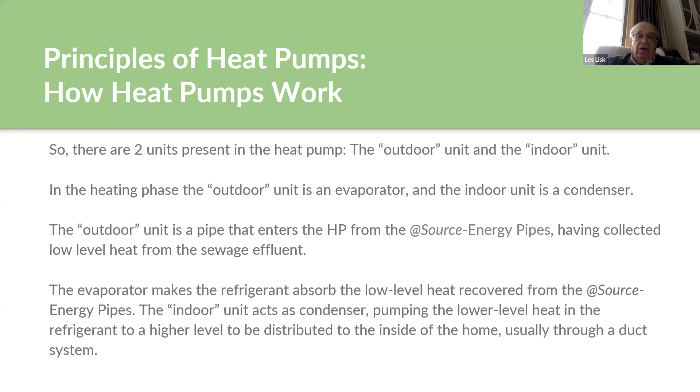Now, I don't know if you can move on a little bit, John, to the geothermal. The one thing with geothermal is that if you have pipes embedded in the ground, it's at a constant temperature all year round. Whereas with an air-to-air heat pump, it varies. It's cool at certain times of year, and it's very warm at other times. Geothermal, if you go down 6 to 10 feet in the ground, it stays almost the same temperature all the time at about 55 degrees, 57 degrees Fahrenheit.

So the efficiency there is that if you wanted to heat the home, you're pumping solution through these pipes in the ground, bringing it into your geothermal heat pump, and if you wanted the room at 70 degrees, as I think someone had just said they turned up the temperature, you'd bring it in at 57, you would only require enough energy to bring it from 57 to 70 degrees, so 13 units. Same with cooling. If it was 80 degrees out and you wanted to bring it down to 70, you'd only have to have 10 units of energy in order to cool it down.

And somebody says, well, how does this work? It's basically a little magic. It's called a TX switch. And it switches from cooling to heating. It goes back and forth automatically. So you set the temperature in your house at 70 degrees and you leave it.

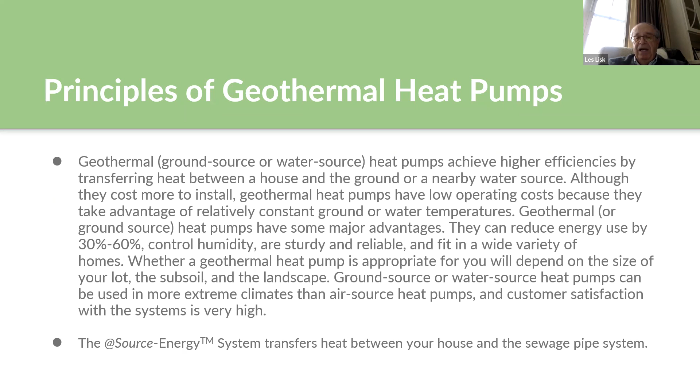Now, the next thing, we went a step further. With ordinary geothermal, I mentioned that there's pipes buried in the ground 6 to 10 feet down where we circulate a fluid through. You can take well water, taking energy out of it, putting it back in another well. You can have it circulating in a lake, taking the water out, putting the water back in.

What we do with our geothermal @Source pipe is that we have a heat exchanger embedded, and John will go into this in detail after. We have it embedded in the walls of our concrete sewer pipe. So the effluent goes down the sewer and it heats up the pipes, and we take the energy out of it by circulating a fluid in our heat exchanger around in the pipes and bringing it back into the geothermal heat pump.

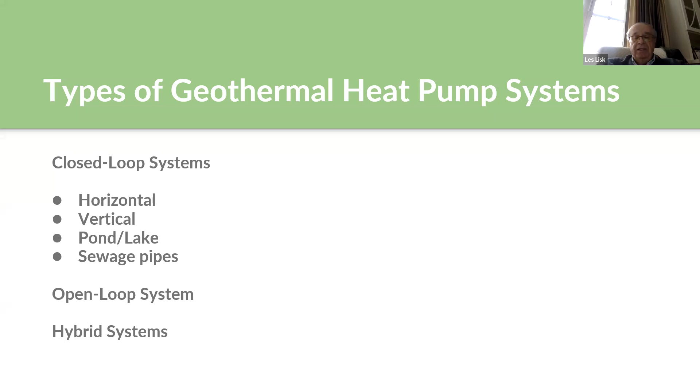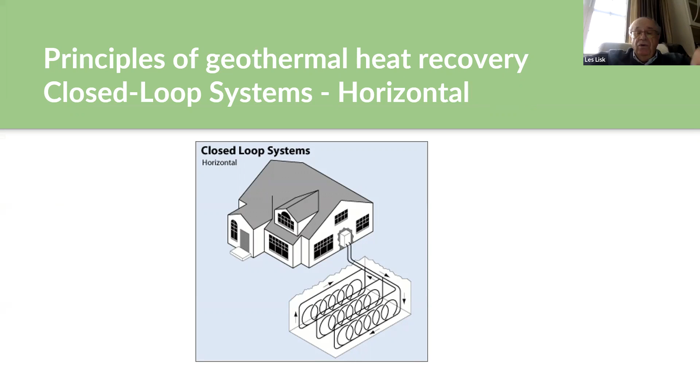Plus, we also use the surrounding ground as a heat source that we can take energy out of or put energy back in, as I was saying before, for cooling. So we use it both ways. And it's very efficient because the system's already there once you install it, and you don't have to install a separate unit for geothermal. So that's a basic principle of it. You can go into detail, but all it involves is a condenser and an evaporator, and it's a very simple system, whether it's a heat pump or a geothermal heat pump.

Les had described a little bit of the system that we have. Here's a little more detail. It shows a house on the right-hand side of your screen with a heat pump, and the heat pump then circulates its fluid. I don't even see my mouse on here. The heat pump circulates its fluid down here and down this line here, and it goes into what we have as a heat recovery system embedded in the walls of our sewage pipe.

So here's a string of sewage pipe that's in front of the home right there, and the fluid goes around these sewer pipes and captures any thermal energy that is in the effluent in the sewage pipe. The nice thing about our system is that since it's in the walls of the sewage pipe, it will also capture heat from the soil around the sewage pipe. So if the soil is warmer than the sewage effluent, then it's capturing it from the soil as opposed to the sewage effluent.

The system then takes it back into the house and back into the heat pump, and the heat pump then distributes that heat throughout the house. If you're looking at a system in California, you probably would not have to put in a supplementary heat system. In Northern Ontario, if you only have 50 feet of frontage on your house, there might not be enough sewage pipe there to provide the energy required to heat your home. So in that case, we could supplement it. Here we show a well, but it could be any type of in-ground heat recovery system.

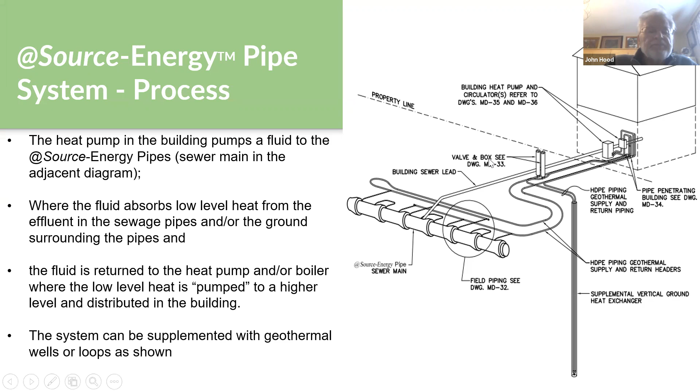I just did a rough calculation here looking at a system where you have 500 houses upstream with a 12-inch diameter sewage pipe. And again, this is in Northern Ontario, so it's going to be a little different where you are. As I say, you're probably not going to need any geothermal wells. In this case, the first 6 houses do not need a geothermal well. There's enough heat coming through the sewage pipes with 500 houses upstream. Following that, we start drawing some heat from geothermal wells to supplement the system.

Now, in this case, I'm trying to find my mouse here, I show a geothermal well at each one of the houses. It doesn't have to be at each one of the houses. It can be a bed of geothermal wells somewhere. But I suspect that in California, you wouldn't even require any of these thermal wells to supplement the system. In this case, we're looking at the differential between putting in an in-ground geothermal system as opposed to our sewer pipes. And for 10 houses here, there would be a saving of $27,810.

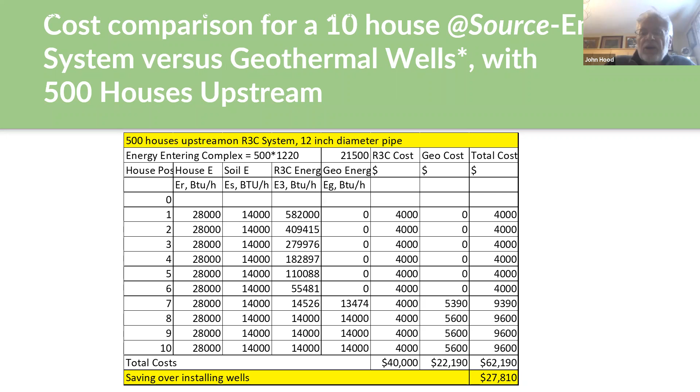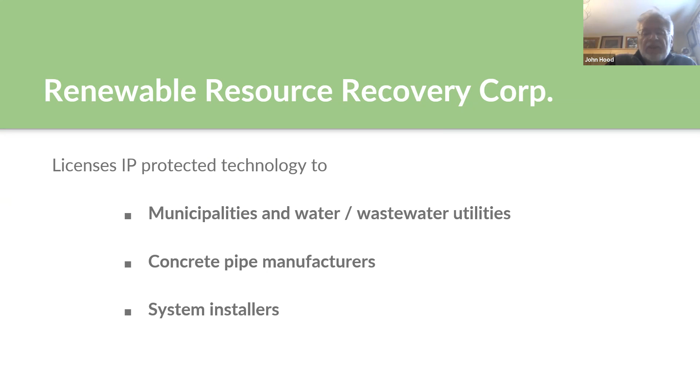We're not a manufacturing company. We don't manufacture these pipes. We're basically a technology company, and we license to other people to look after the system. So we would have concrete pipe manufacturers licensed to manufacture our pipe, and system installers licensed to install the system. And municipalities already own the sewer pipes in front of the house, so they could own the heating system as well, and be licensed to sell the heat and collect revenue from the homeowner for the heat.

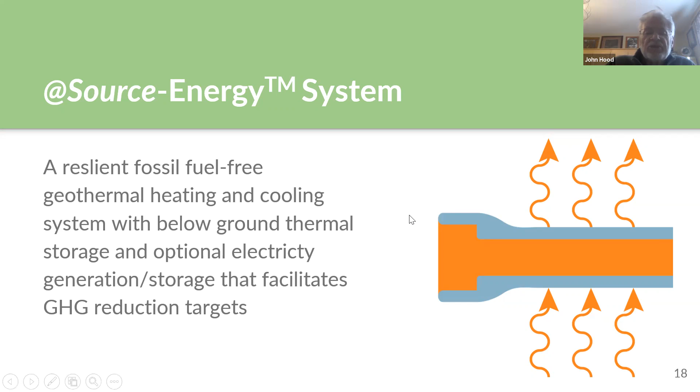We also have, which we'll get into shortly, a hybrid PVT, a photovoltaic thermal panel that we've developed. And with that system, you can come up with a system where you don't have any external energy coming into your home. The sewage pipe provides the thermal energy for your home, and the PVT panels provide the electricity to operate the heat pump that runs the system, that controls the entire system.

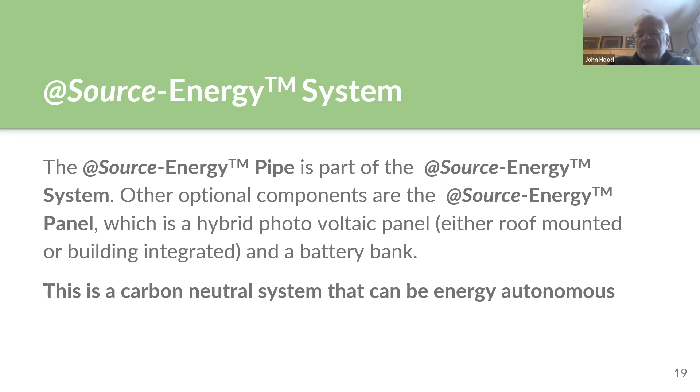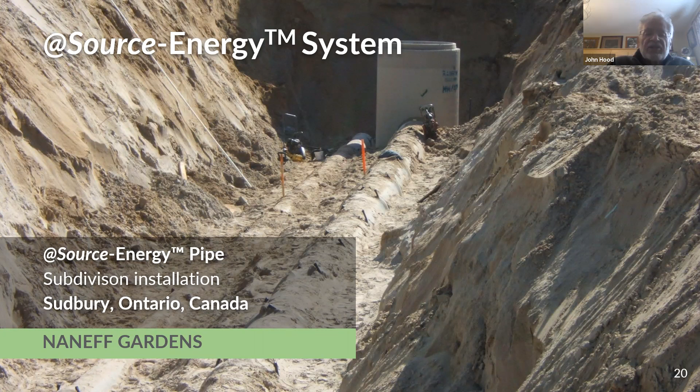And it was interesting. There was one day that Les and I went to the building to take a look at it. And I think it was -20 outside that day, Les. Yes. And the heat coming off of the back of the panels was 20 degrees above. So that was a 40-degree difference. And we'll get into the advantages of that shortly.

This is a building, maybe Les, you want to explain this building? This is the first zero energy building for seniors being built in Canada, and we're using our products on it. One of the products we're using is the At Source energy pipe, as John has explained, for the sewage, and we're going to be taking energy out of it and putting energy back to the surrounding area to store it in the summer for the fall and winter.

We also have our At Source energy panel. I'll just go over it briefly now. We call it a PVT panel, and it's photovoltaic and thermal. We use the same principle as our At Source pipe, where we have a photovoltaic panel and a heat exchanger behind it. What we do is we circulate a fluid and glycol, and we take energy away, because when it's producing electricity, it's also producing heat.

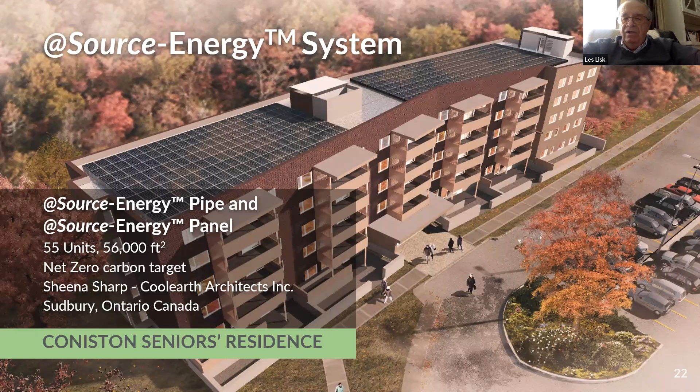And one of the things, and you probably do have this as a big problem in California, the more heat you have on a photovoltaic panel, the less energy you get out of it. So we take that energy away from behind the PV panel. The efficiency of the PV goes up, it produces more electricity. We're taking thermal energy out, and we can use it to heat the building or heat the water for the domestic hot water.

We could just have it by itself like that, just for domestic hot water or heating, or we can combine it with our At Source pipe, where we store the energy that we're collecting from behind the PV panels in the ground. We use the ground as a storage for energy at a later date when we need it. So that's basically what happens there. And John has just put up the operating costs and how efficient it is. Maybe you'd like to go over that, John.

Yeah, this slide just shows the advantage of using a system like this, where we're using the sewage pipes as the energy system: there are no operating costs, and basically it's maintenance free over the entire life of the system. From short calculations that we've done, there's a short payback of costs, about 7.5 years. And it can also be combined with geothermal wells and fields if necessary.

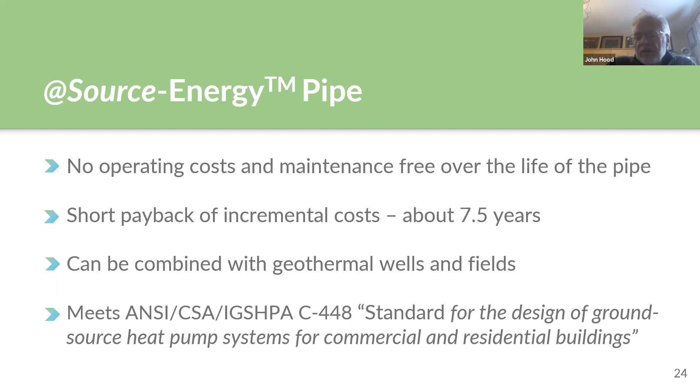There's a standard, ANSI CSA C448, for geothermal wells. We meet the requirements of that standard. As a matter of fact, that standard is currently being modified so that it will cover systems like ours.

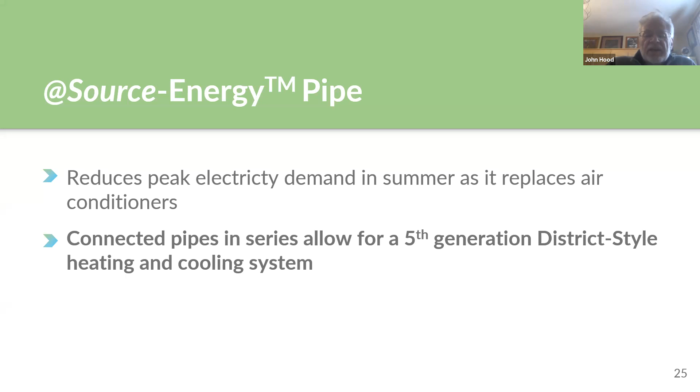The other thing the pipe does is, of course, it reduces peak electrical demand in the summertime because it's replacing air conditioners. You take the heat from the building in the summertime and dump it into the ground around the sewage pipes. We're getting to the stage now where electricity demand is becoming an issue. The other thing we're going to explain here is what's called a fifth generation district heating and cooling system.

This is sort of a schematic showing the system, and it just shows red and blue lines going around a number of different structures here. But that would be a contiguous sewer pipe that would be in the ground. And the sewer pipe already is contiguous, so it's not like you're developing anything new here. The sewer pipe already runs right down the street and around the block and everything else.

So you can capture energy then from all of these various buildings that would be connected into the sewer pipe, whether it's houses or industrial buildings or commercial stores and what have you. And there can also be storage systems put along the system. The storage system could be geothermal wells, and they just supplement and boost the system as required.

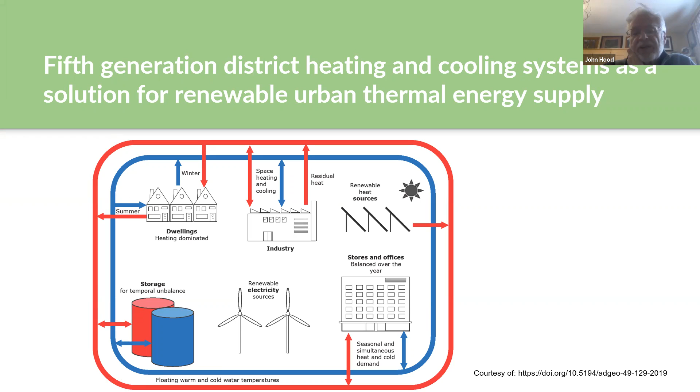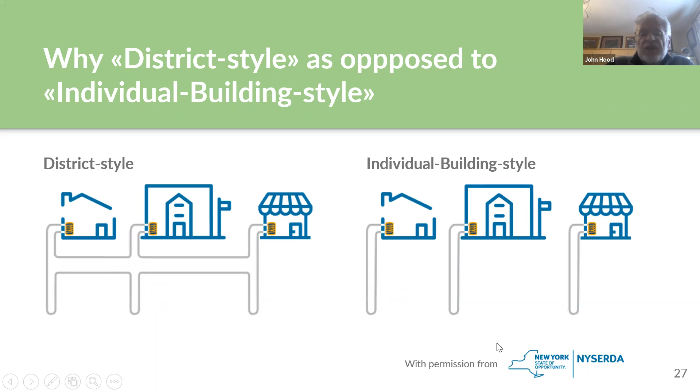So at any particular point, if there's excess heat in the system, it can be stored in the geothermal wells, or if it requires more heat in the system, it can be extracted from the geothermal wells. Now, the benefits are that here's a district energy system on the left side of the screen, and here's individual buildings on the right-hand side of the screen.

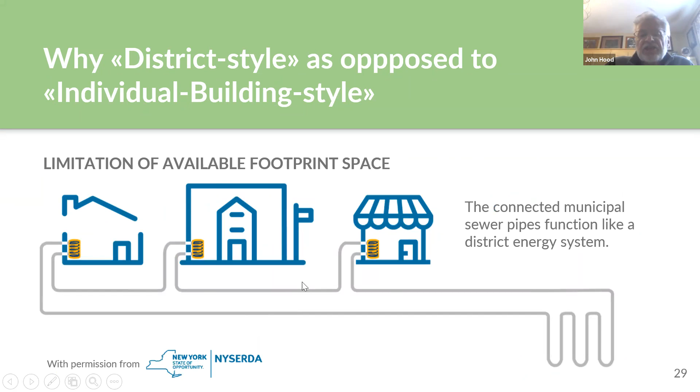In the afternoon, when the school's demanding heat, that's fine. It's drawing heat out of the system. And then later in the evening, when the homes are drawing heat out of the system, the school is no longer drawing heat out of the system. So it flattens the whole system, and it's certainly less costly than putting in an individual geothermal at each one of the buildings.

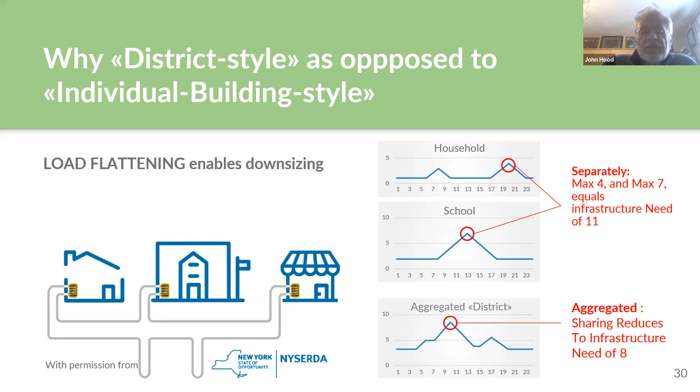And with this system, municipalities and wastewater utilities can become energy suppliers. So we like to say that this is the only sewage pipe around that pays for itself. At least in Northern Ontario, the sewage holes, everything costs more money because of frost in the ground and damaging and everything else. Well, our system pays for itself. It actually collects heat from the sewage that is there.

And it can become a new revenue source for energy deliverers, whether the energy deliverer is the municipality or a private company. And of course, whoever is delivering the energy can also get into the business. Just like right now, at least in Northern Ontario, you can rent your water heater from the water supply company, or you can buy one on your own. So in this particular case, heat pumps could be rented out to the homeowners.

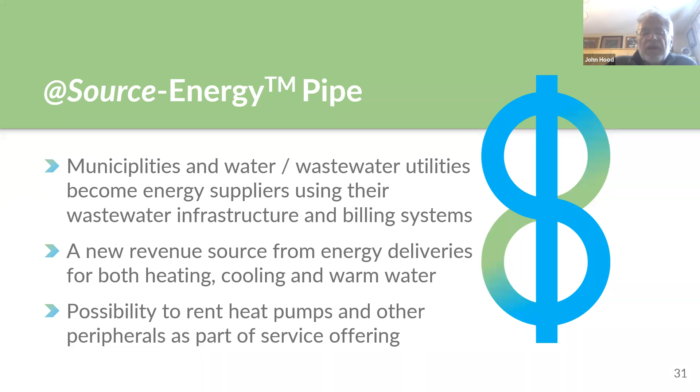And I'm sure you have this problem there, because we even have this problem in Canada: if people have just heat recovery panels on the building, not the photovoltaic panels but thermal panels, Les and I have driven around in the summertime, and we see that most of these panels are covered over because they're creating too much thermal energy, and people have no way to store it. Now, if you have a swimming pool, that's great. You can put the thermal energy into your swimming pool, but otherwise you simply have to cover them up. You can't use them.

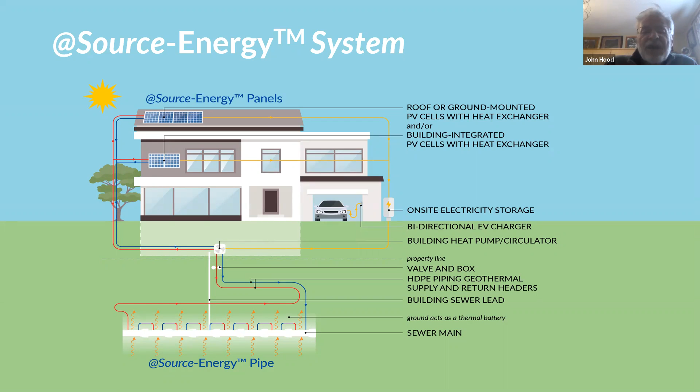So photovoltaic, and one of the issues with photovoltaic panels is that when the panels heat up, they lose efficiency, and research has shown that they can lose about 30% of their electrical generating capacity. Not only do they lose electrical generating capacity, and this certainly would be a problem in California, not as much of a problem here in the wintertime, or certainly not today, but the heat is also destructive to building materials.

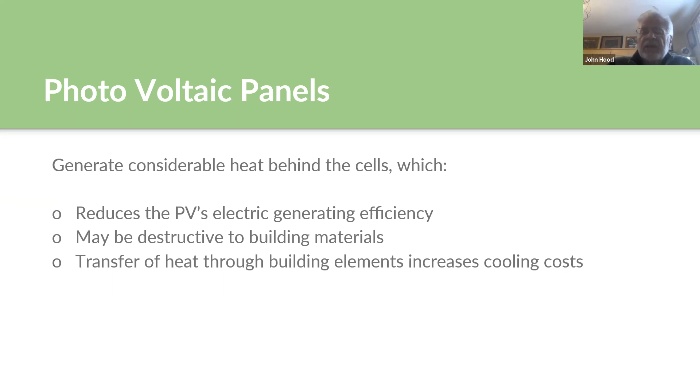Your photovoltaic panels are on the roof. There's always a gap underneath the panels when they install them for air to circulate behind the panels, but a lot of that heat is still directed into the building, and heat isn't good for anything. It destroys building materials. The other problem is that heat is transferred through the walls or through the roof of your building into your building, which means you're having to cool that extra heat that is coming into the building as well. So standard photovoltaic panels are a problem in that sense.

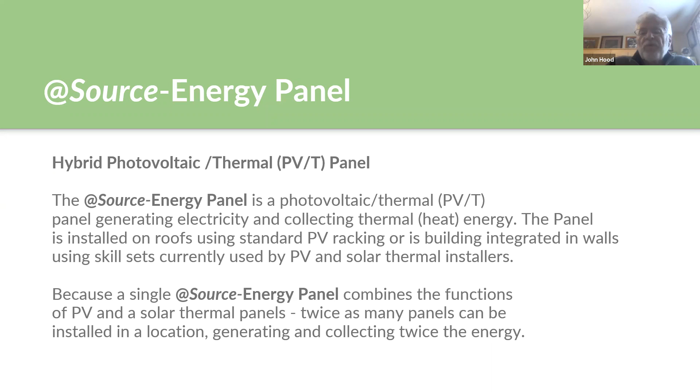Now, with the PVT panels that we have, they capture this heat from the back of the panel, and they therefore eliminate this reduction of generation of the panel, because the panel is heating up. And also, of course, if you want to have both thermal and photovoltaic panels on your roof, well, half of the roof will have to be PV and the other half thermal. With the PVT panels, you can put twice the number of photovoltaic panels on the building roof because they also function as the thermal energy panels.

The panels, then you can extract the heat generated by the PV panels and store it for later use, or you can use it also as a part of your system to heat the hot water for your home. And again, by cooling the back of the panels off, we increase the efficiency of the panels.

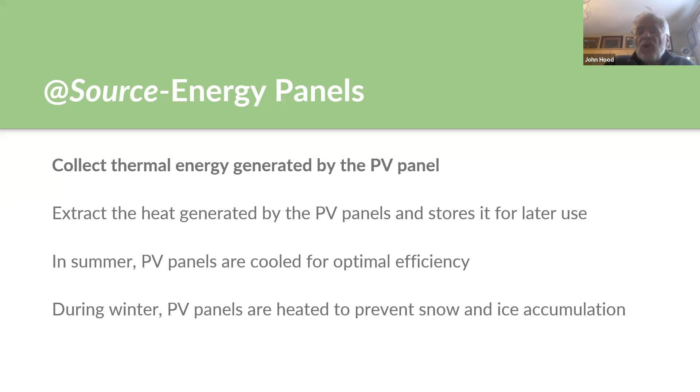Now, you certainly don't have this problem in Orange, California, but maybe if you get up in the mountains there and other parts, if you have any snow that gets on PV panels at all, just a strip of snow across the bottom of the panels, it eliminates their electrical generation. Now, with these systems that we have, because they're connected to the fluid in the back of the panel, we can reverse it and put the warm water into the back of the panel, which would then melt the snow off of the panel. Again, that's a problem here, not so much there.

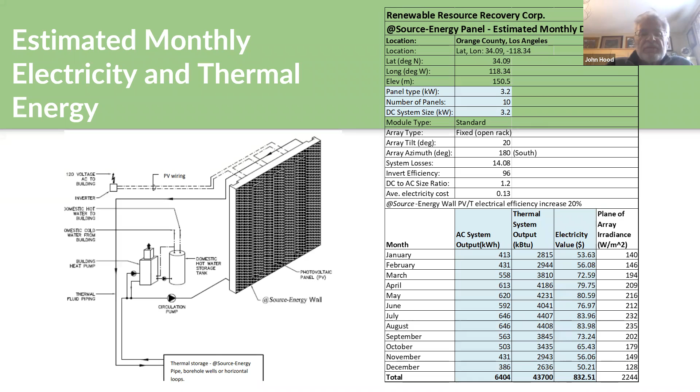Without the heat recovery system in the back of the panels, they'd be generating about 5,000 kilowatt hours. And the thermal coming out of the panel is 43,700 kBTUs. I don't know what your rate is right now for electricity, but I had figured on 13 cents per kilowatt hour. Based on that, the saving per year would be $832. The system has been recognized by geothermal magazines throughout the world.

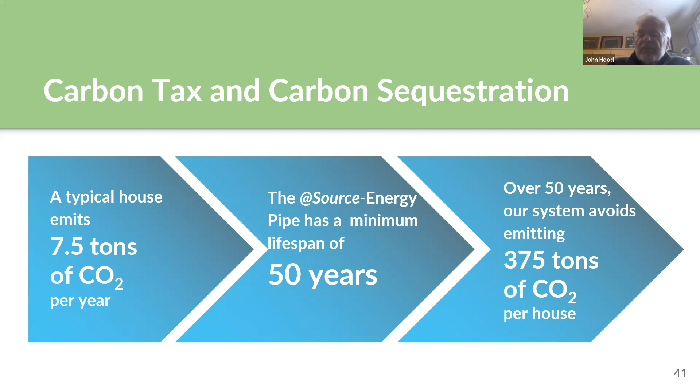Now, how can this thing be funded? Well, a typical house emits about 7.5 tons of CO2 per year. And the @Source-Energy Pipe has a minimum lifespan of 50 years. So over 50 years, our system would be avoiding 375 tons of CO2 per house. And we are having to start to worry about CO2 emissions. And in terms of carbon sequestration, normally it costs

Sorry, trying to figure out which phone was doing the ringing there. I was turning off the wrong one.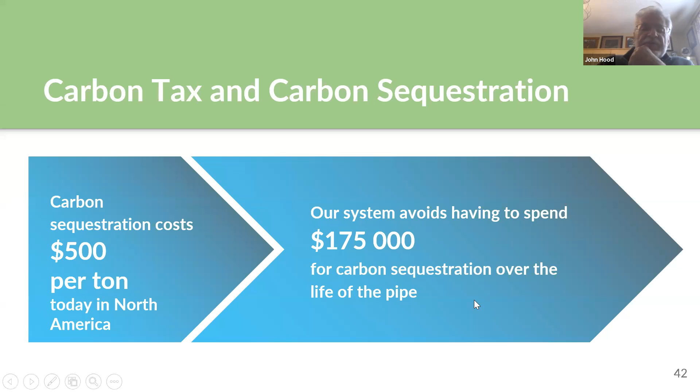Sequestering carbon costs about $500 a ton, and our system will avoid 175,000 then over the life of the system. And we took a price of $500 a ton because of the carbon tax. Now, I think in California with your system there, you're at about $25 a ton right now. I'm not sure, but I think it's in that area. And anyways, at $50 a ton over the life of the pipe, a subsidy of $17,500 can be paid to install a system by the carbon emissions that are being saved.

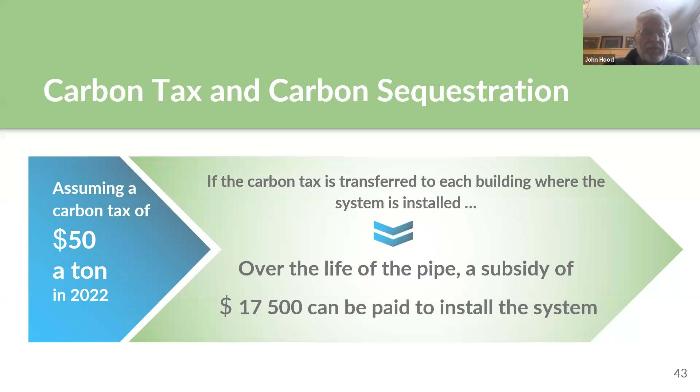So, geez, we're ending very early. I'm hoping there are some questions that people want to ask. Nothing in the chat. If you don't feel comfortable just speaking up, you can certainly use the chat line, or just go ahead and take yourself off mute and ask the question.

Hey, John, it's Daniel. I've got one. Having lived in Southern Ontario, I'm aware of this sort of system. And I've heard that in Southern California, the problem with a subterranean heat exchanger is that over time, the heat that's pumped into the soil, because we cool predominantly rather than heat, warms it up to the extent that you can no longer take advantage of cooling the pipes down. Do you guys have comparative studies for different climate zones?

Well, that could be a problem if you have geothermal wells, for instance, or loops in the ground. In our particular case with the sewage pipe, you always have the sewage effluent flowing through that pipe. So you'll be drawing away some of that heat that is there. Now, I don't know in California how much of a problem that would be, but certainly it's less of a problem than you would have with geothermal wells or loops. Anything else?